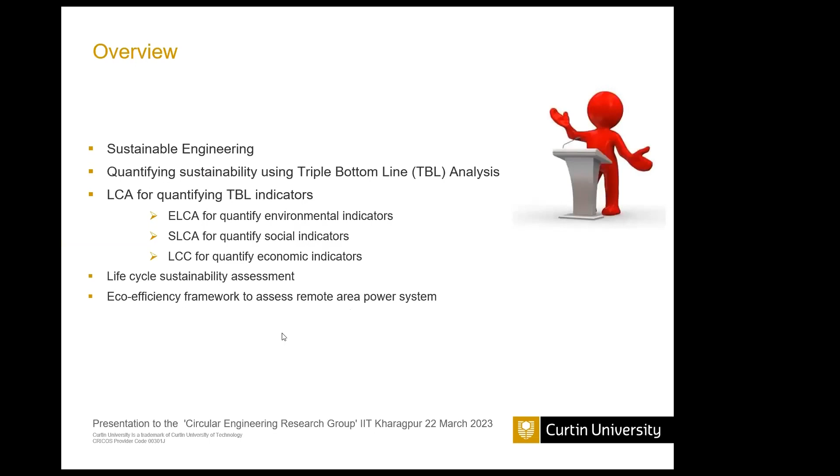So I always start, since I came from an engineering background, with this powerful definition of sustainable engineering. And I like this definition: the engineering context of sustainability involves the design and management of sustainable technology, which is economically, environmentally, and socially sustainable, research into environmental and social impact and limitation, living within global limitations.

We have got one Earth equivalent amount of resources. At the moment, we are consuming more than 1.8 Earth equivalent amounts of resources. If we are not changing, if we are not innovating, if we do not take drastic action, we will need 3 to 4 planets by the middle of this century, but we don't even have one planet. So we need to apply innovative engineering design that will enable us to live within our means, within our carrying capacity.

So management of resources from cradle to cradle, we need to design products in a way that they can be remanufactured, recycled, recovered, so that end-of-life products can be turned into new products. If we're able to avoid sink, we can automatically avoid source. So life cycle assessment can help us achieve a cradle to cradle design that will help achieve a circular economy, that will convert waste to resources, and that will have positive economic, social, and environmental consequences.

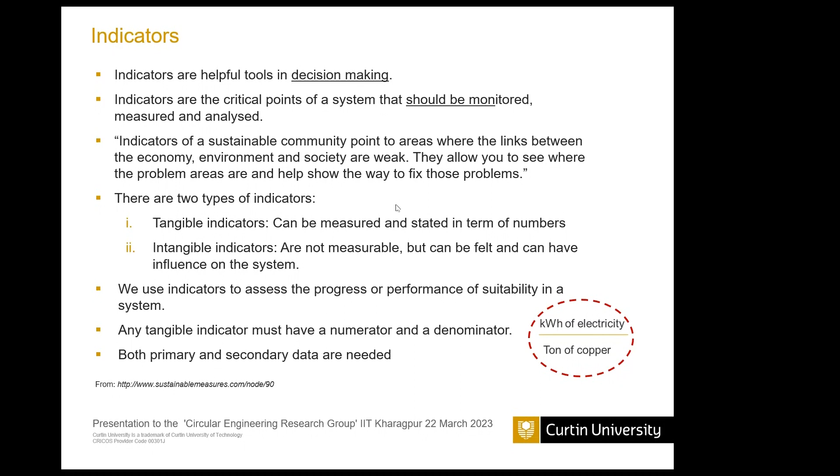So these are some typical examples of indicators. Indicators need to be determined in a way that doesn't increase the cost or the workload. We need to be smart in determining the type of indicators used to assess the sustainability performance of a product. Having a good number of indicators doesn't mean we're doing a good job. We need to determine as small a number of indicators as possible so that it can represent the whole system.

For example, look at this indicator: number of school dropouts. It is mainly relevant to mining industries. If the number of school dropouts increases, it means parents are leaving. Why are parents leaving? Because there's some problem in the environment or surrounding areas. So this gives an indication that something wrong is happening in that area. We need to use indicators in a way that represents the product and its characteristics, and can help assess the sustainability performance of a product.

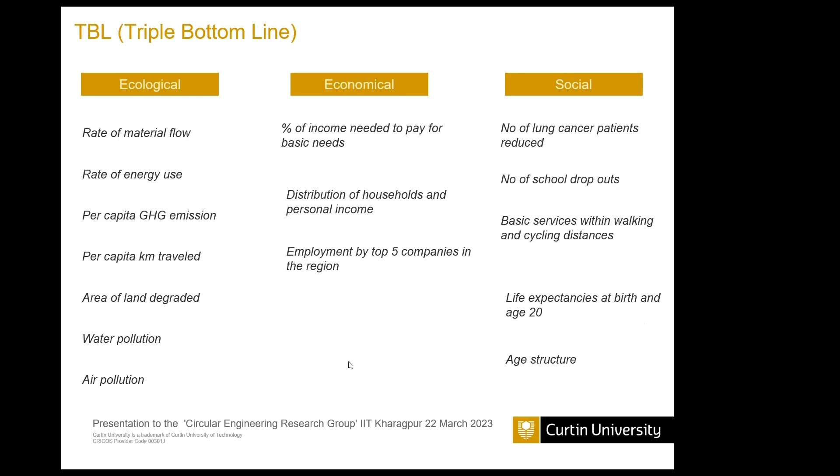Now, how do we do this? There are 4 steps. Number 1, researchers need to do a literature review to find out what indicators are considered by other researchers when assessing the performance of a certain product. Then the researcher has to conduct a survey, engaging people who are experts in this area to provide opinion on whether it's relevant or irrelevant. There's also a provision for them to provide additional indicators in case the researcher is missing some.

When they're providing this input, they're also requested to provide a ranking of these indicators - whether it's very important, less important, moderately important, etc. Once the indicators are finally selected after this survey, these rankings are converted to weights, because we cannot give equal weight to all indicators. Different indicators will have different weights, and this varies from country to country.

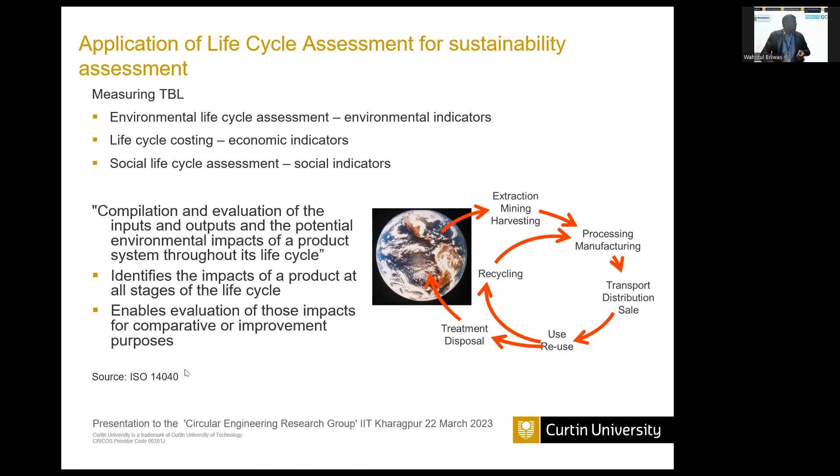This life cycle assessment can help compare different products doing the same job, or different versions of the same product, with reduced environmental impact, social impact, and cost impact. It can help in green product design by identifying the hotspot - which process or chemical, in which stage, is causing the most impact - so that the right solution can be provided.

I often say to my students that what doctors cannot do, engineers can do. Engineers can turn end-of-life products into new products through innovative design processes. We need to consider this at the design stage so that at end of life, we can prevent disposal to landfill and turn it into a new product through disassembling, recycling, recovering, and remanufacturing strategies.

So life cycle assessment can help us design a product that is durable, recyclable, that can be remanufactured, that is green, with reduced carbon footprint or environmental footprint. It can help design innovative processes - refinery processes, manufacturing processes - with reduced oil, reduced lubricant, reduced chemicals, and more recycling strategies.

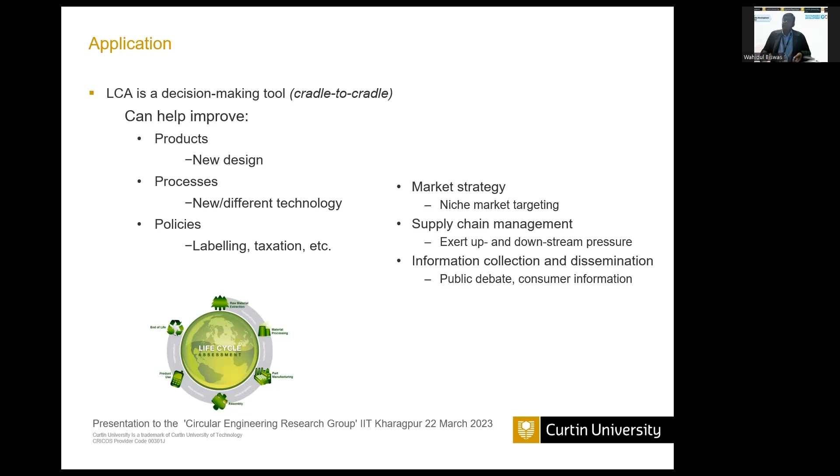This life cycle assessment follows International Standards Organization guidelines. It has goal and scope, then life cycle inventory, then impact assessment, then interpretation.

Goal and scope varies from country to country, product to product, company to company, and each has their own intention. Sometimes they're interested in the carbon footprint of the production and manufacturing of a car instead of driving it, or they're interested in the carbon footprint of milk, not cheese, or something else. So it varies from company to company. Now in the case of scope, scope depends on the goal, and scope and goal together set up the boundary.

Boundary means the number of stages in a product's life cycle that need to be considered. We need a functional unit so that it can help us capture all inputs and outputs that were used and emitted during the life cycle of a product. This functional unit helps us do a mass balance, to estimate or quantify the amount of inputs in the form of energy, electricity, chemicals, water, and material used in different processes at different stages of the product life cycle.

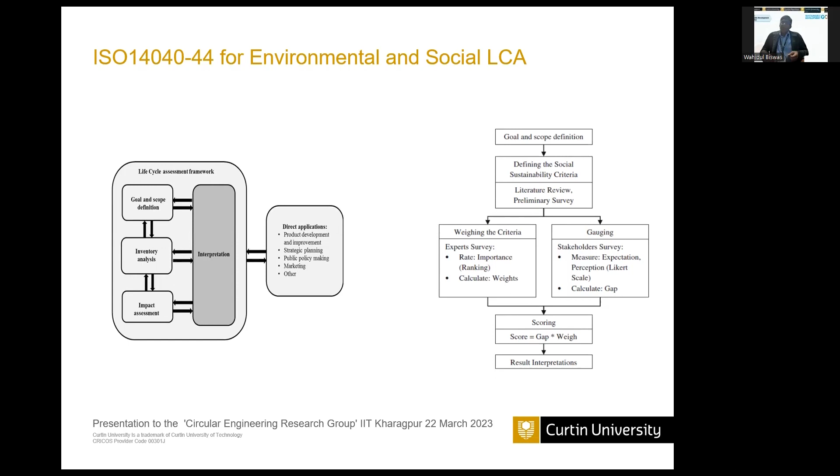So if it's a 5-point Likert scale, and the maximum point is 5, and their satisfaction level is 3, then there is a gap. What is the gap? 3 minus 5 equals -2, that's the gap. This -2 is multiplied by the corresponding weight. As mentioned, these weights are discerned or determined by responses given by experts during the survey. Once we multiply the gap, which is -2 or -3, by the corresponding weight, we get the social impact score. That's how we determine social impact.

Now in the case of life cycle costing, we consider the same inputs that we considered in the environmental life cycle assessment. Only the kg, liter, kilowatt hour, gigajoule, cubic meter, all these values are translated to dollars, so that we can do the life cycle costing for the same system boundary, the same stages, the same inputs, etc.

Now when we do life cycle costing, we need to anticipate the future cost. But it has limitations, because COVID may come again, economics may change, politics may change, war may come, and we don't know it. But something is better than nothing, and it helps in the decision-making process, anticipating future replacement cost, operational cost, maintenance cost, etc. So we need to convert all these costs to present value, and there is a formula that can help us calculate this present value.

Once we have determined the present value, we can then calculate life cycle cost, payback period, and benefit cost ratios. These are some common economic indicators used in triple bottom line analysis.

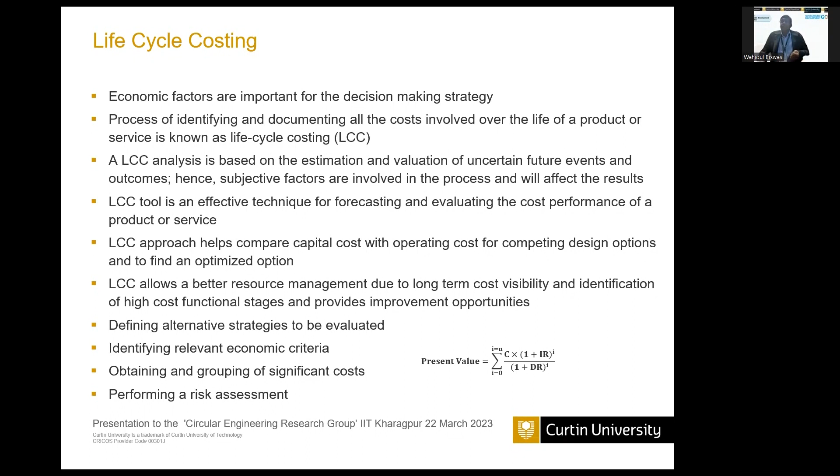As I mentioned, the integrated sustainability framework integrates 3 tools: environmental life cycle assessment, social life cycle assessment, and life cycle costing. These tools work by integrating social, economic, and environmental indicators, which are determined using these tools. That's why it's known as integrating, and we're able to get a single sustainability indicator.

It has a number of steps and a good number of equations. We have social indicators, economic indicators, and environmental indicators. We integrate all social indicators into one indicator, all economic indicators into one indicator, and all environmental indicators into one. So then we have 3 indicators, one each for economic, social, and environmental. Finally, we integrate all 3 indicators into one sustainability score.

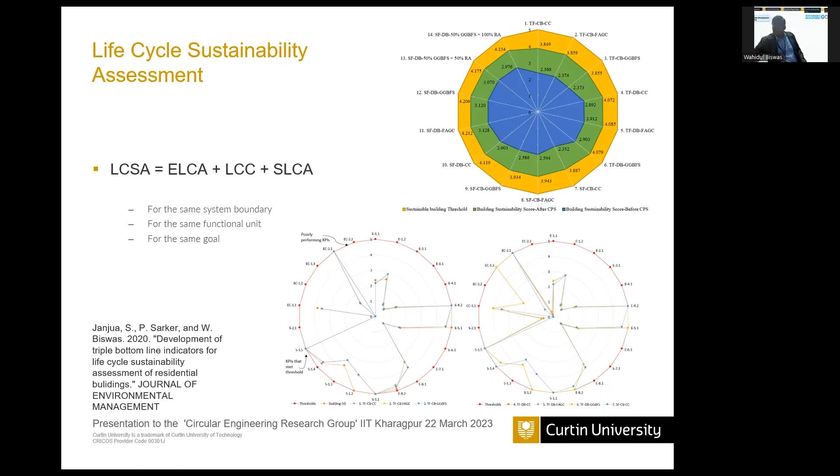That's the thing. Now, why take an LCA approach in decision making? I've had lots of personal good experiences, but one relevant to this workshop is a project I did about 13 years ago, collaborating with colleagues at the University of Western Australia and a government department, the Department of Agriculture and Food.

The University of Western Australia provided me with data, and I collaborated with soil scientists. They provided me with fertilizer data, pesticide data, diesel data, farm machinery data, soil emission data, both direct and indirect, so that I could do the life cycle assessment of biodiesel production from canola seeds.

When I determined the functional unit, I chose gigajoule, not cubic meter or kilogram. Why? Because the purpose of biodiesel is to produce energy, to give us a service. So for the same amount of energy, we get different amounts of biofuel. The amount of biofuel giving that energy is different from the amount of diesel giving the same energy. That's why we chose megajoule or gigajoule as the functional unit.

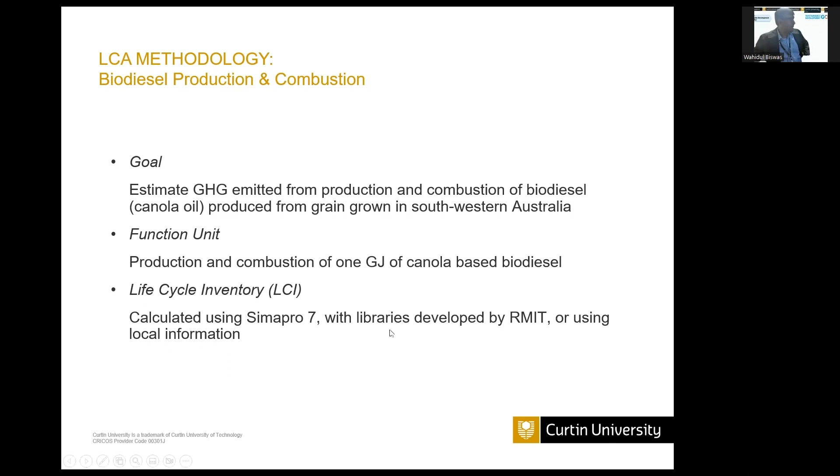This LCA is a limited, focused LCA because we did not estimate other environmental impacts. We only focused on greenhouse gas emissions, because at this time the Australian government introduced a carbon trading scheme, so the funder, the Grains Research and Development Corporation, wanted us to estimate the GHG emission. There are two significant messages coming up from this analysis. First, when we initially used the default IPCC value for soil emission, because it is very expensive, time expensive, and resource expensive to measure nitrous oxide from soil.

That's why we initially used the IPCC default value. When we used it, we found that nitrous oxide emission from the paddock or field is the hottest spot. But then we got a grant equivalent to 1 million Australian dollars to appoint a research fellow to measure, to stay in the field, to stay in the workstation, to work with the gas chromatograph and gas chambers to measure the amount of nitrous oxide on an hourly basis. After one year, they gave me one value, and that cost a couple of $100,000.

Once I used that local value for nitrous oxide, I found it is 50 times less than the IPCC value. And ladies and gentlemen, nitrous oxide is 265 times more powerful than normal carbon dioxide emission. So any change in the value of nitrous oxide can make a big change in the total life cycle greenhouse gas emission. We need to make sure we measure this value correctly, using the local value. If it is a biological system, if it's coming from plants, we need to use the local value, otherwise we are underestimating or overestimating the result.

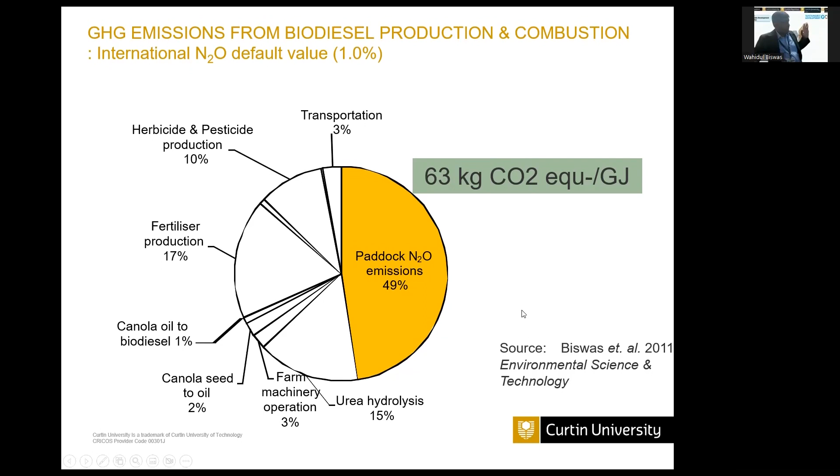Now, once we incorporated this local value, it is not the nitrous oxide, but the production of fertilizer that is the culprit. We found the real culprit. This helps in the decision making.

Why? Because the next year we got another $1 million grant, which continued for 3 years. So we grew lupin before canola. Lupin can fix nitrogen because it is a leguminous crop, and that nitrogen was transferred to canola in the next year, so the amount of fertilizer application was reduced. Since fertilizer application was reduced, greenhouse gas emission was reduced. This is action research, and that's why LCA is a very powerful decision-making tool, as we have proved.

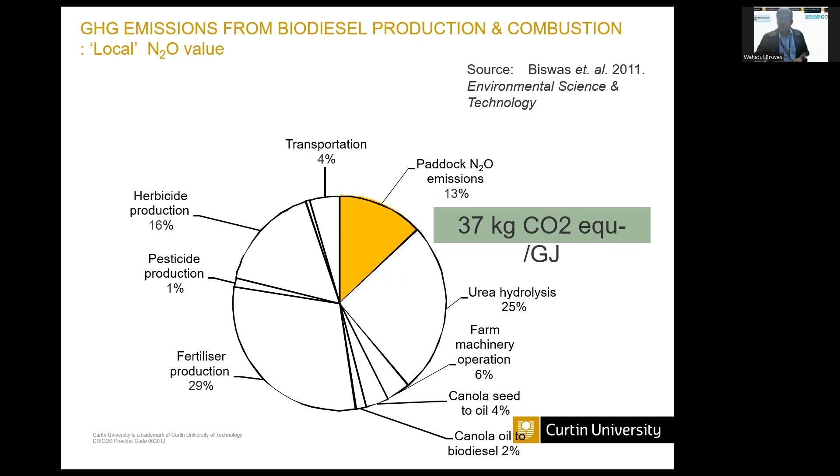This graph shows production: if we're only considering production, biodiesel at 100%, but there are some technical engine combustion characteristics that may not allow us to go up to that level. We need to sacrifice engine performance. In the production stage, diesel performs better than biofuel because biofuel requires pesticide, herbicide, fertilizer, diesel, all these things. So it is an input-intensive fuel.

But when we go to combustion, burning biodiesel produces carbon dioxide, of course, but that carbon dioxide is considered biogenic, meaning it was sequestered by the plant. So any carbon dioxide emitted due to combustion of biodiesel is considered zero. That's why in the combustion stage, BD100, meaning 100% biodiesel, performs better than BD20, because BD20 is only 20% biodiesel and 80% diesel, so most emissions come from diesel. So if we consider total life cycle emission, biodiesel performs better than diesel. That's the message.

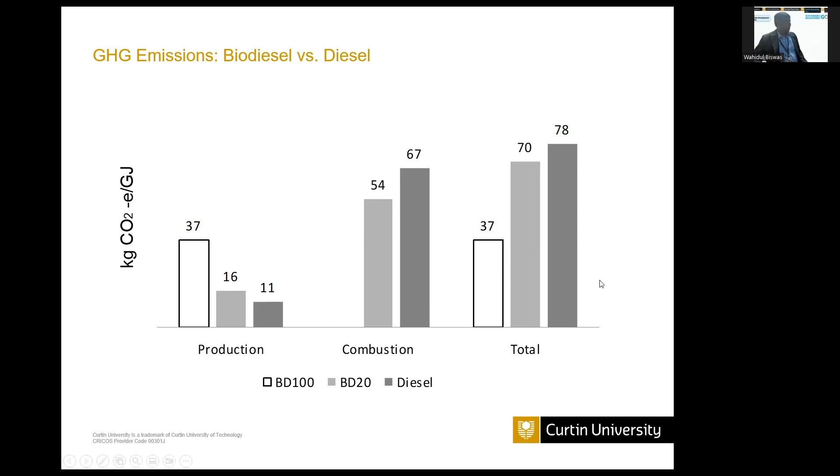Now, in the case of social life cycle assessment, this was done by one of my good colleagues at the University of Queensland. I think Manik was his PhD student, and they did the social life cycle assessment of palm oil in Indonesia. There are 5 main social impact categories, and this graph gives a very useful message, because the indicator far away from the periphery is the hotspot where improvement is required. Cultural heritage was found to be the number one social hotspot, because there was displacement of 2 tribal communities, Orang Rimba and Batin.

What could be some improvement strategies? The government needs to take measures to fully recognize and protect the rights of the tribal communities disadvantaged by the expansion of palm oil plantations. That's the improvement strategy. The second hotspot is working condition. You see the gap is quite high, quite big. I think this is because of poor working conditions, poor wages, etc.

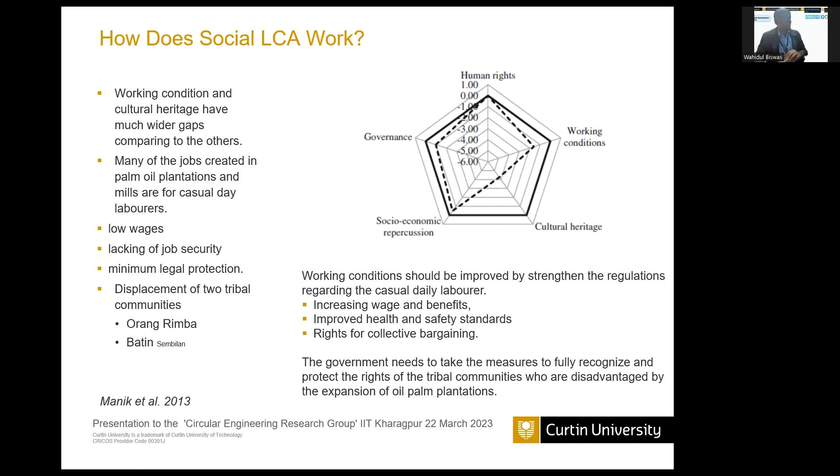So these are some of the social improvement strategies that can be incorporated in order to improve social performance. The message given by this graph is that it can enable us to find out where are some social hotspots, and that can help in decision-making strategies to come up with social improvement strategies, etc.

Now there is an eco-efficiency framework used. Why is this eco-efficiency framework used? Because sometimes when we're improving environmental performance, nothing is free of cost. So when you are improving environmental performance, you're putting in money. So it is environmentally feasible but not economically viable. On the other hand, if it is cheap, it is economically feasible but not environmentally friendly. But there is a framework consisting of a large number of equations, which have not been incorporated here, that can help balance both economic and environmental pillars of sustainability.

So that's why I put this figure, the seesaw effect. It helps find out which option is the best environmentally friendly option, without entailing excessive cost. So there's a portfolio position. When you're comparing different products, different fuels, like hydrogen fuel or biofuel, or electric vehicle, that is alternative technologies. If we're considering different types of transport, we can use this framework because it's mainly applicable for comparative analysis. Any change in the variable of one product will change the position of another product.

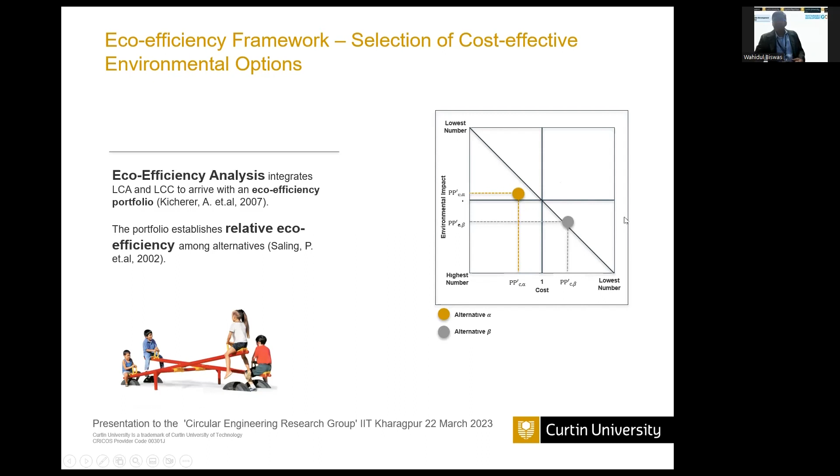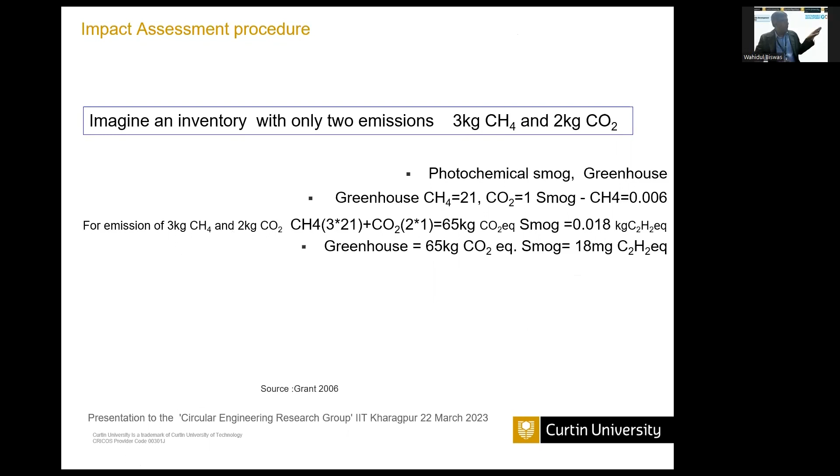For example, I have given this because this shows how we can convert different emissions to one single score, which is the sustainability score or environmental score, known as the eco point. So you need to classify, then you need to characterize, because different numbers of emission gases are causing some impact. You need to convert all these gases under the same impact to a common impact, which represents this gas, like carbon dioxide for global warming.

So once you've converted to the equivalent amount of impact, you need to compare it with the national average. You can get rid of units, so you can normalize. Then you need to multiply it by the corresponding weight, because different environmental impacts have different weights. So this is how you can convert a large number of emissions to one single score, known as the eco point. This is used in this framework because we need to convert all environmental impacts to one single unit.

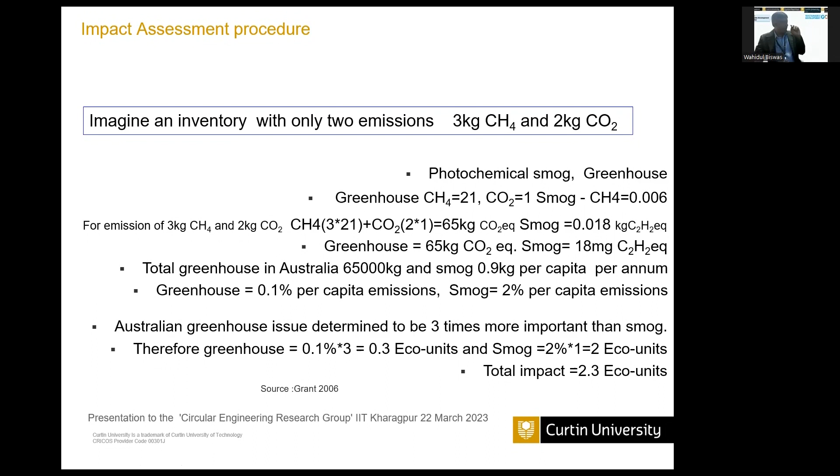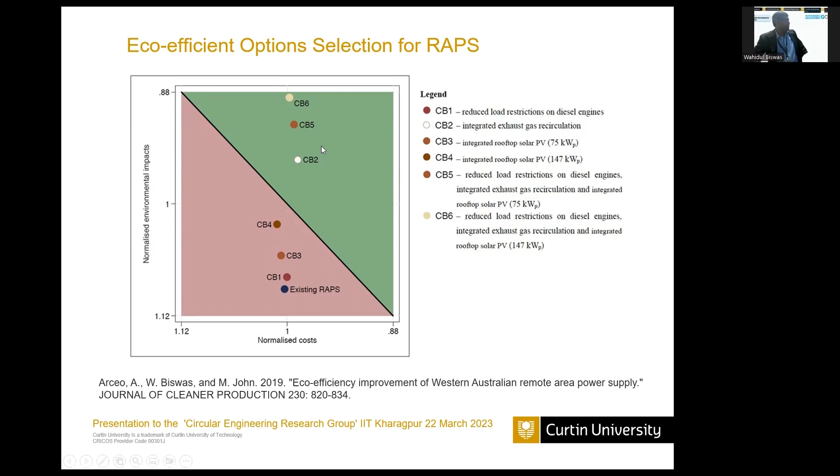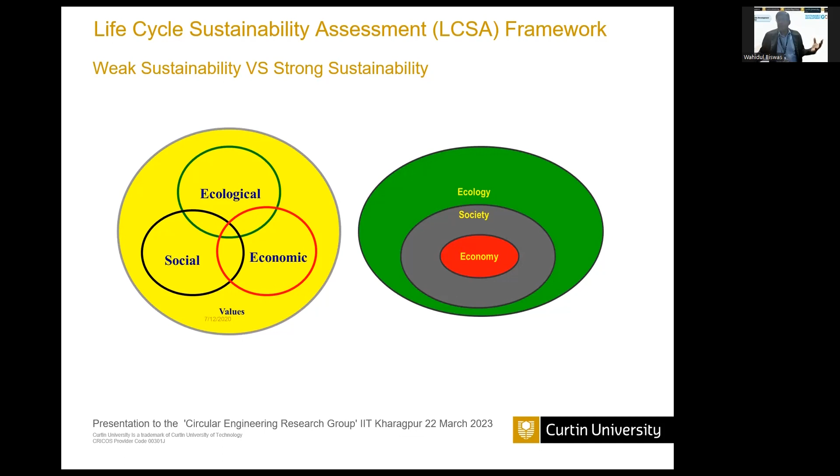Now, the reason I'm discussing this difference between weak sustainability and strong sustainability is because I developed a framework for another PhD student, and that framework should follow strong sustainability. If you look at this nested diagram, it determines strong sustainability, because we have got one earth. We need to cut our coat according to the cloth. We cannot exceed the biophysical limit, we cannot exceed the carrying capacity. So our technological design, or our economic and social development, needs to take into account the biophysical limitation, or carrying capacity, or biophysical limit of Mother Nature.

So that framework, according to the framework, is for biofuel and different types of transportation fuel. First they have to meet environmental criteria. There are some threshold values they have to achieve. If not, they cannot go for social assessment. We need to apply improvement strategies until it becomes environmentally friendly. Once that option becomes environmentally friendly, then we go for social assessment, and once it is socially viable, then we can go for economic assessment.

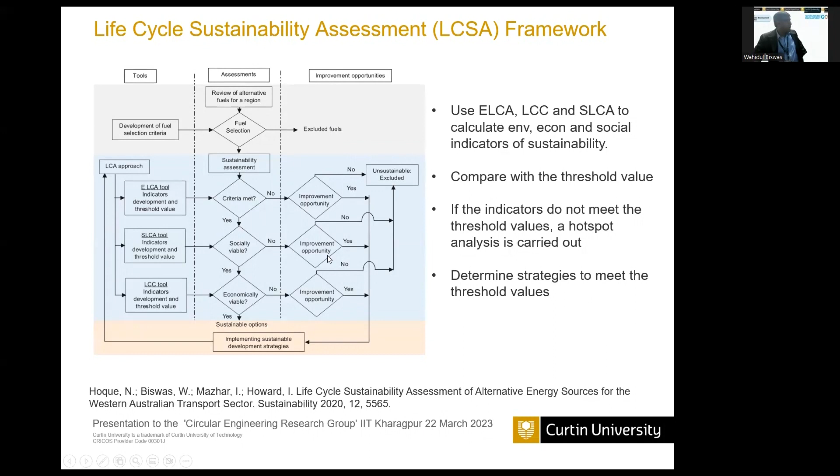So we have published about 5 papers in good journals. We considered 4 types of transportation systems using hydrogen, E65, electric vehicle, and plug-in hybrid electric vehicle using both electricity and petrol. The reason we considered E65 is that this is the optimum engine combustion performance and fuel efficiency it can give.

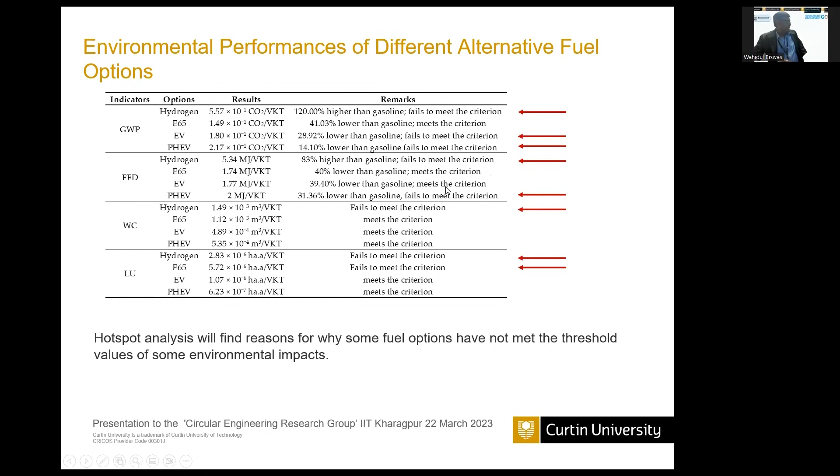We selected these 4 indicators on the basis of the expert survey that I mentioned to you. Unfortunately, none of them were found completely environmentally sustainable.

For social performance, there are 4 indicators that we also selected by interviewing experts and local people: job creation, conservation of fossil fuel for future generations (intergenerational social equity), occupational health and safety, and reduction in household expenditure by switching to different fuel.

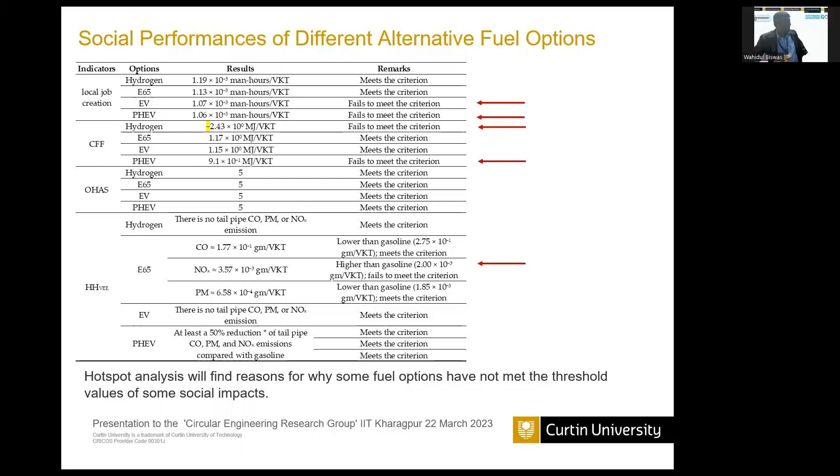And in this case, we found that it is better than the environmental aspect. So some fuels met the environmental target. For social, most of the fuel options met the social sustainability target.

But in the case of economic indicators, we had 2 variables: net benefit and carbon reduction credit. Most of them did not meet the criteria. So we know where the problem is.

Now we investigated life cycle costing, social life cycle assessment, and environmental life cycle assessment. We went back to the inventory and tried to see which item is actually increasing the cost, where the main social problem is, where the main environmental problem is, where improvement is needed, and what technological improvement is needed to improve them.

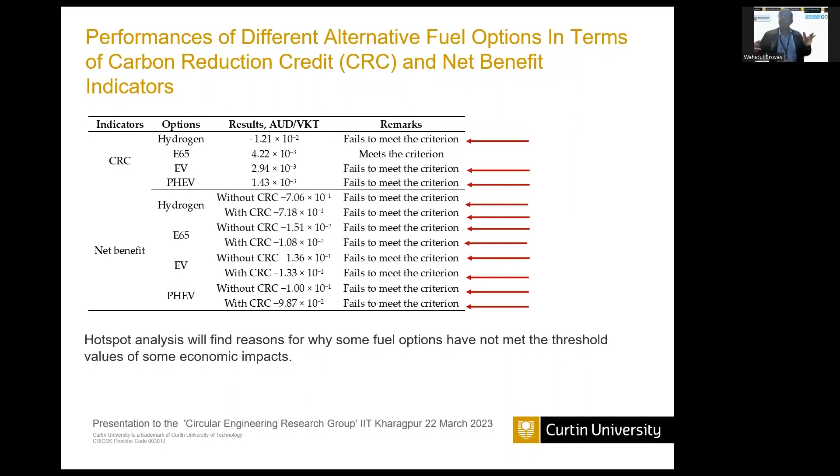So accordingly, we selected technologies. For hydrogen, we considered options like renewable electricity for hydrogen production and utilization of the oxygen byproduct. We considered all possible ways.

So why is this framework important? It helps us determine sustainability strategies or improvement strategies - what could be the right strategies or solutions to achieve sustainable development. So we considered these strategies for hydrogen, and all these strategies for electric vehicle.

And then we tried to see whether all environmental, social, and economic criteria met the threshold value. In the case of hydrogen, it was not sustainable because of economics. It is sustainable from social and environmental aspects, but not from the economic aspect.

But in the case of electric vehicle, after incorporating these strategies, we found that yes, they met all the criteria, so they are sustainable.

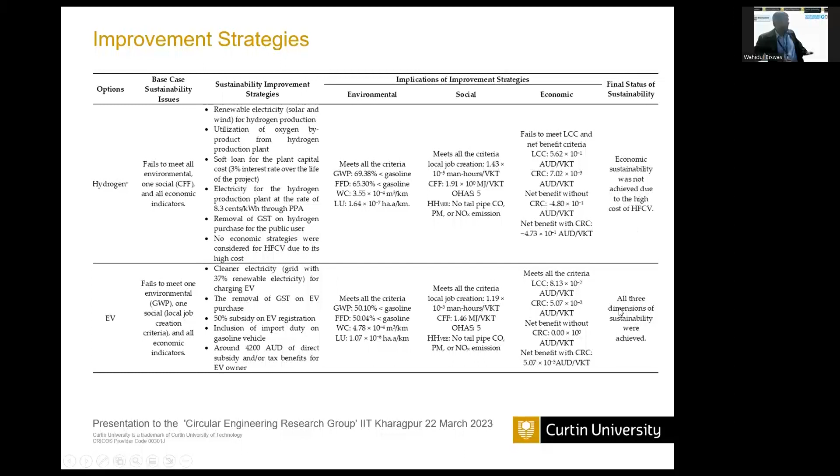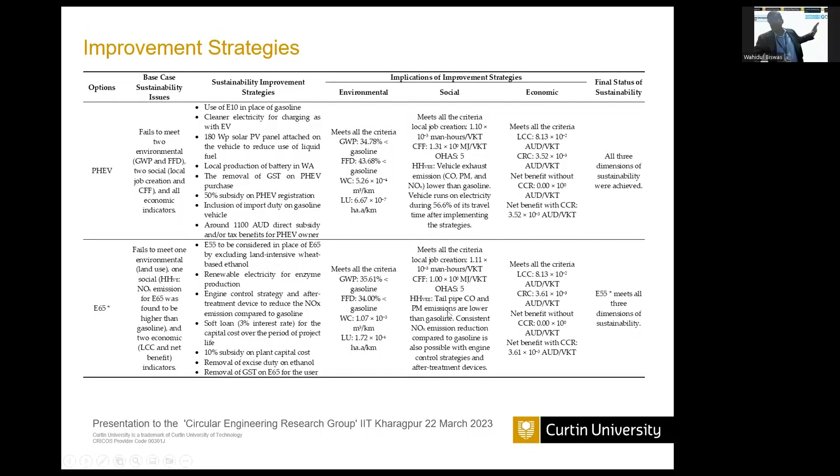And this framework can potentially be utilized by the government or ministry to decide which fuel to use, what strategies to implement, and it will vary from country to country, region to region, etc.

And selection of the most sustainable option.